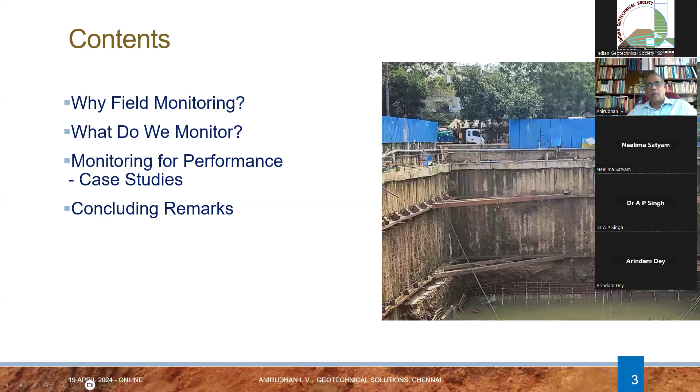Why do we need to monitor a geotechnical structure or geotechnical activity? We all know that soil, or the ground, is very complex, and understanding its behavior is not very simple. However, we simplify the ground and substructure models to satisfy a design, and we often resort to finite element and finite difference analysis to solve more complex problems.

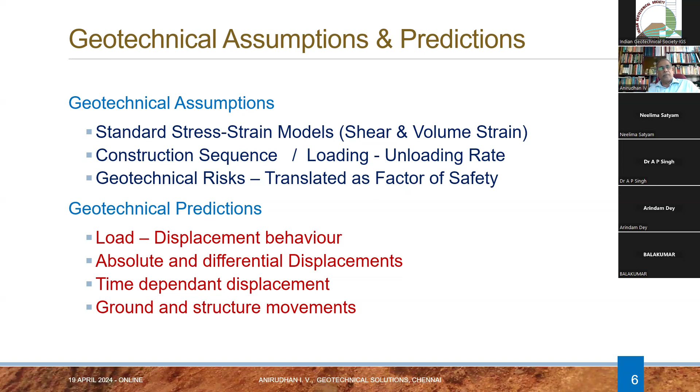We make several geotechnical assumptions to fulfill this design. We assume certain stress-strain models, a construction sequence, and all the geotechnical risks are tackled by a concept of factor of safety. During the design process, we make predictions, especially about the foundation or ground movement under the design geotechnical activity. All these assumptions and predictions are based on our experience and whatever literature we have. Many researchers have produced literature based on their studies, so we use these references to make our assumptions and predictions.

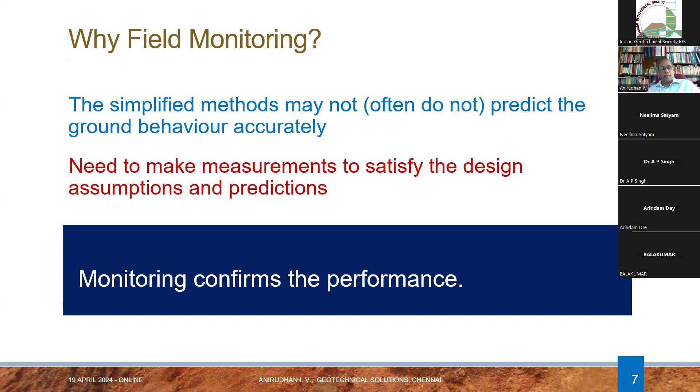But we still have to validate these assumptions and predictions. We can see that simplified methods may not often predict the behavior very accurately, and we need to make measurements to confirm our assumptions and predictions. So monitoring of a geotechnical structure confirms the performance, and to some extent, whether we were good in making certain assumptions and predicting the performance.

It is important to decide what we monitor for achieving our goal of validating our design. Commonly monitored parameters are movements in the ground and the structure, which are predicted during the design analysis. We also measure excess pore water pressure when dealing with improvement of soft clay deposits, and occasionally we measure the stresses and strains in the foundation elements and in the soil, as in the case of retaining walls or deep foundations.

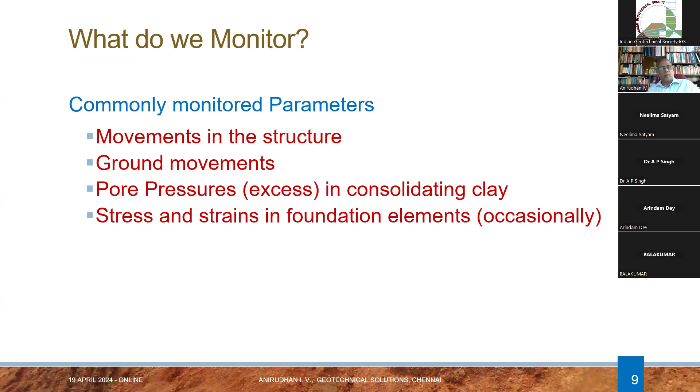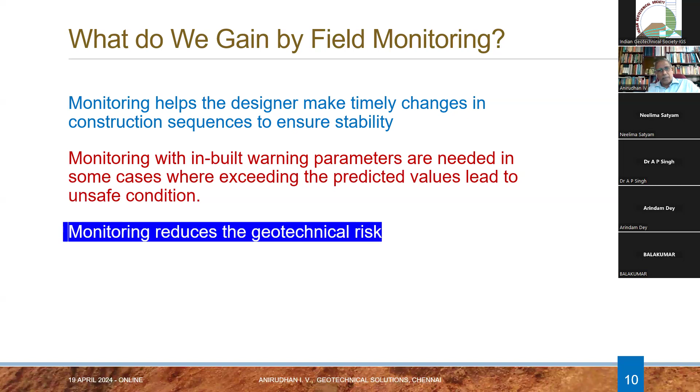So what do we gain by this field monitoring? Monitoring helps the designer make necessary changes in certain cases. We can also provide inbuilt warning stages for attempting mitigation measures if found necessary. Monitoring reduces geotechnical risk. Most geotechnical risks are highlighted when we monitor a structure, and we can take timely action to rescue the structure, make amendments, or take additional precautions to make the structure stable.

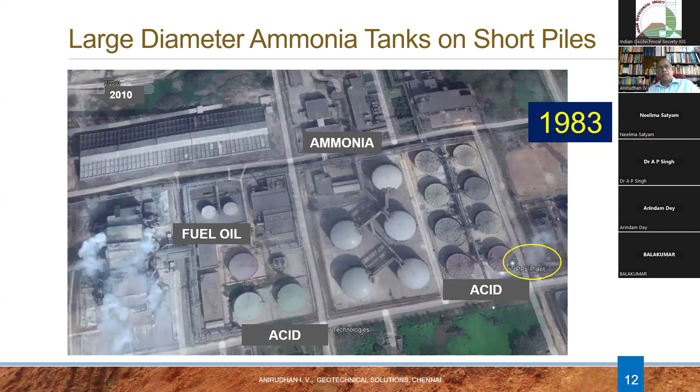I'll present a couple of case studies in which I was involved in the design, execution, and performance monitoring. One case is large diameter ammonia tanks on short piles. This project was executed in 1983, just after my graduation, and was my first field assignment after graduation.

The site is Paradeep Phosphates factory in Orissa, built in 1983. There were 13 large diameter steel tanks storing liquid ammonia, phosphoric acid, and sulfuric acid. All these tanks imposed roughly 180 kilonewton per meter square pressure at the tank base. There were also two fuel oil tanks, smaller in size, built on ring wall foundations because the loading was about 100 kilonewton per meter square.

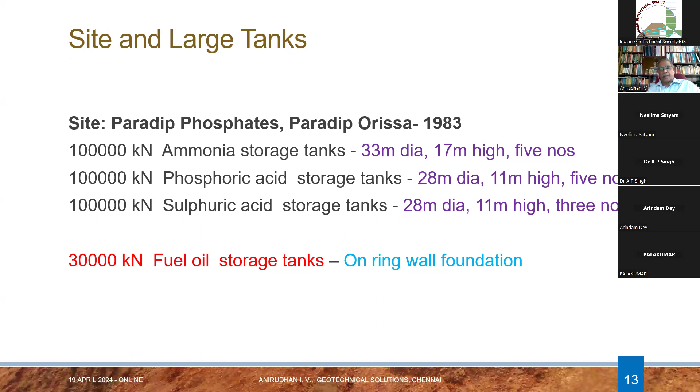The project owners decided to support it on a ring wall with minimum ground improvement, replacing the top 2 meters of soil. The subsoil conditions at the site comprise loose deposits up to about 5 meters, followed by medium and dense soil layers, mostly sandy type soil.

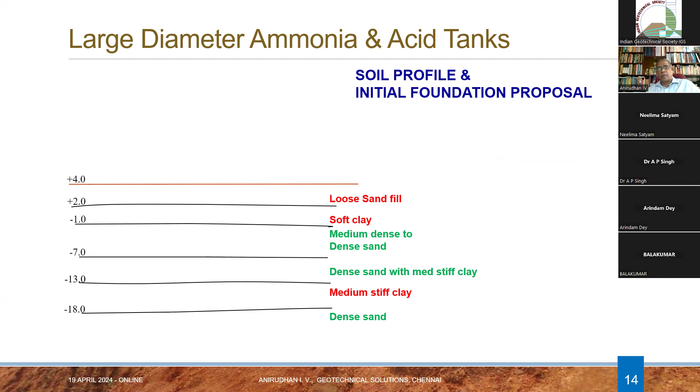In the 80s, small diameter driven cast-in-situ piles were very common, and the maximum size of any pile foundation was 600 mm, in the case of bored piles. In this project, they decided to go for driven cast-in-situ piles of 450 millimeter diameter, driven to a depth of 27 meters.

This was the proposal given by the main principal consultant, and we were appointed later as consultants for some structures on the site, and this ammonia tank foundation design came into our scope.

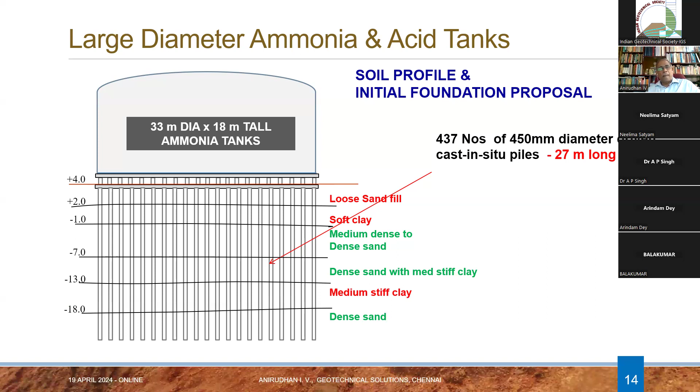We found that there are a lot of challenges in constructing 27-meter long driven cast-in-situ piles. Those who have been involved in or seen how driven cast-in-situ piles are installed know there is a lot of difficulty in handling such long tubes. Even if you use followers, we find a lot of difficulty handling such large follower tubes.

The dropping of concrete from such height can also result in segregation of the concrete. Usually, the allowed dropping height in driven cast-in-situ piles is something like 18 to 20 meters. There is also difficulty in handling very long reinforcement cages. And of course, the long piles, because of all these issues and additional requirements, cost very high compared to the normal standard length of driven cast-in-situ piles.

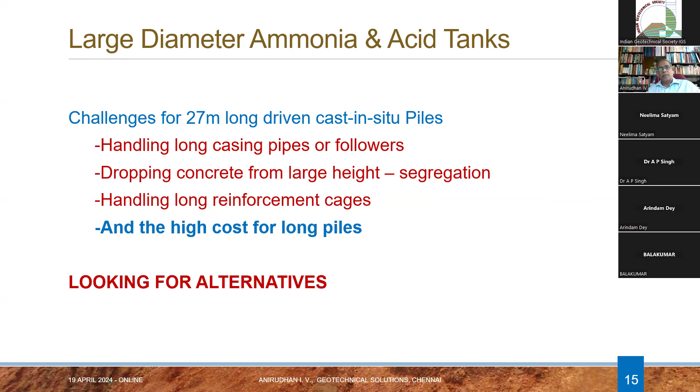So we had to look for alternatives to tackle all these issues. Because of the large loading, since the tank is 18 meters in height, we had to go for deep foundations — a shallow foundation was not adequate. So we had to make a lot of analysis for alternatives, like different lengths of piles.

For finalizing the design, we know that a single pile has very small settlement. We usually measure 6 to 10 millimeter settlement for individual piles when loaded individually. But when piles are installed in a large group, it results in very large settlement because of the very large influence zone involved under the large group.

Unlike a single pile, which has a very small influence zone, a very large group has a very large influence zone, resulting in very large settlements. So we had to do detailed settlement analysis for different options.

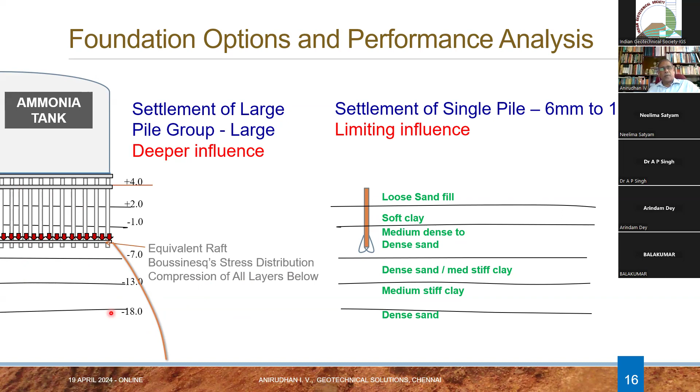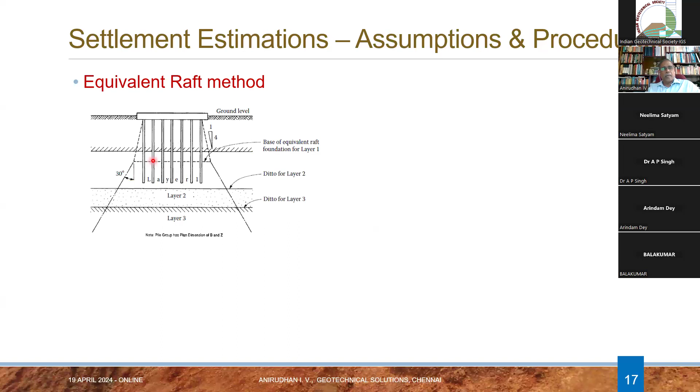During the 80s, we had very limited procedures available for estimating the settlement of a large group of piles. One of the most accepted procedures was assuming an equivalent raft at some depth, usually at 2/3 of the pile length, because of the friction developed along the pile. We assume the load is transferred to 2/3 of the pile length, then it acts like a full raft foundation, distributing from that point like a normal flexible raft foundation.

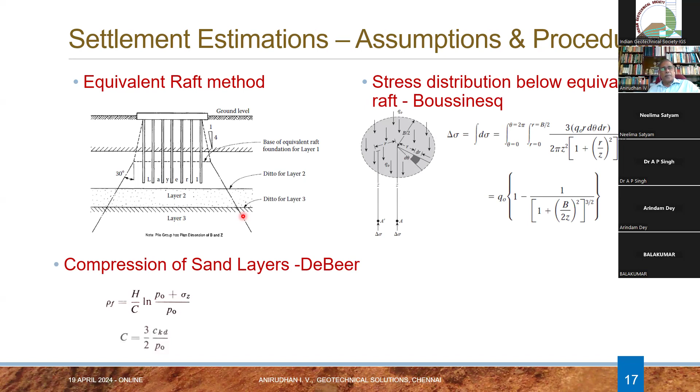We used Boussinesq's stress distribution below the ground for estimating stress levels in different layers, since the profile comprised of several layers. We estimated the compression of sand layers using the standard procedural expressions — these were the standard procedures we used to adopt in those days.

After the estimation, we analyzed a foundation without piles, which resulted in very large settlements, something like 200 to 300 millimeters at the center. We then analyzed the settlement of a long pile foundation, which resulted in about 40 to 60 millimeters at the center and 33 to 45 millimeters at the edges along the periphery.

Because of the piles, we have pile-soil interaction, increasing the settlement along the periphery a little more, and marginally reducing the settlement at the center. So we expected about 40 to 54 millimeters along the periphery in the case of 27-meter long pile foundations.

In the case of shorter piles, like 10-meter and 14-meter, we decided not to go for 27-meter long piles because of the construction issues, and we used the construction methods commonly practiced in those periods.

We tried analyzing the 10-meter pile and 14-meter pile cases, and found these settlements were not varying so much — in the range of 60 to 100 mm at the center and 48 to 64 millimeters at the periphery. Because of the pile-soil interaction, we expect a little more settlement along the periphery, while we expect a small reduction at the center.

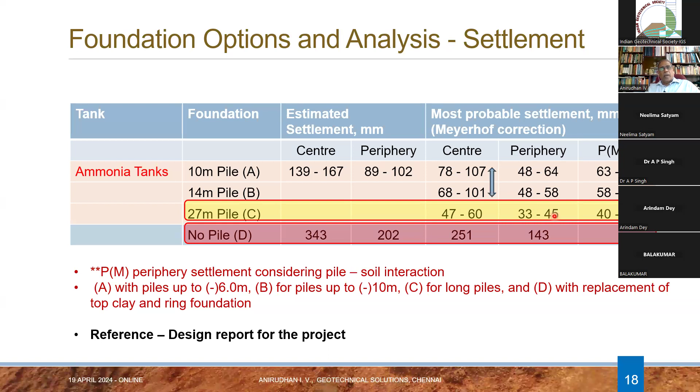So we went for shorter piles below the ammonia tanks and acid tanks. We provided 437 piles of 10-meter length, with individual pile capacity of 55 tons.

For the 10-meter pile, we expected a maximum settlement of 107 millimeters at the center and 64 millimeters along the periphery. But because of the interaction, we expected about 85 millimeters along the periphery once we applied the full loading of the tank.

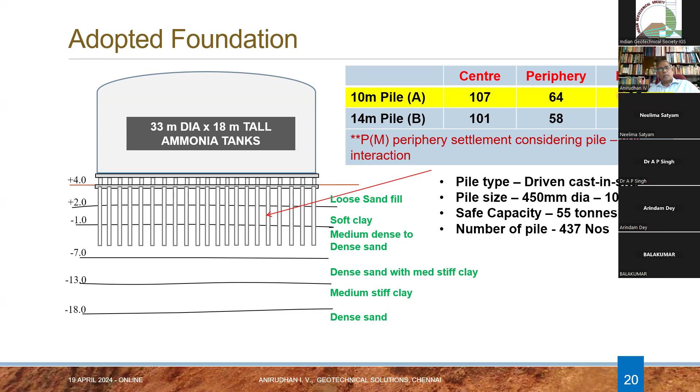So we first monitored the performance of the individual piles by way of conducting individual pile load tests, and we found the maximum settlement under 62.5 kilonewton load is about 5 mm, with an average elastic rebound of 2.8 millimeters. This is a usual finding for any piles having friction as well as end bearing, and the individual piles were performing as we expected.

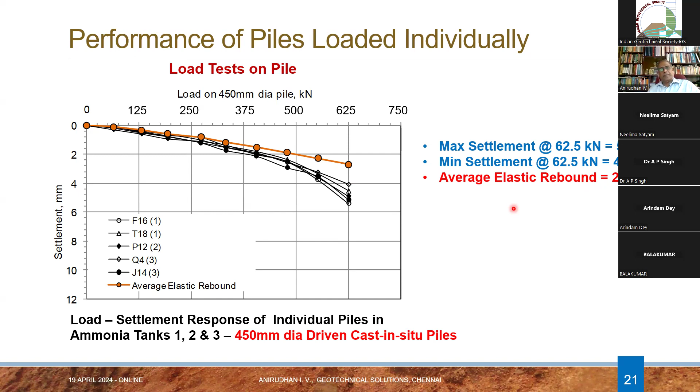We decided to monitor the tanks during hydro test with 8 observation points along the periphery and 1 at the center. We installed one individual single pile as a reference point approximately 50 meters away from the tanks to use as a reference for measuring the settlements.

So we used a very simple method of water tube level measurements for measuring the settlement along the boundary as well as at the center. In this case, the measurement at the center was not difficult because the tank foundation had 2 slabs, one at the ground level and one at about 1.8 meter above the ground, so we were able to go underneath the tank to make any measurements.

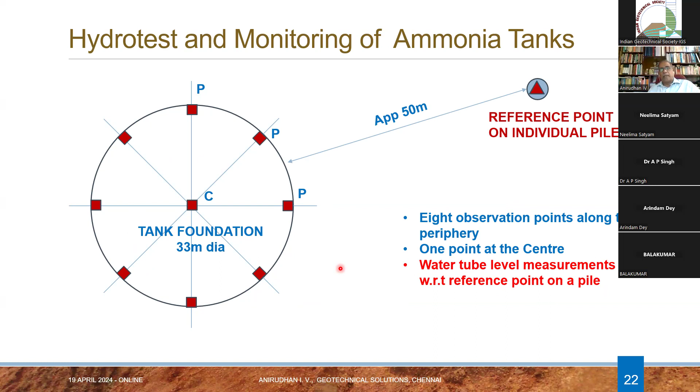We loaded the tank in 4 stages: 6-meter water fill, maintained for about 1.5 months; then filled up to 10 meters and waited for 2 months; 14-meter with 2.5 months holding period; and the maximum water load of 17.9 meters with a 3 months holding period.

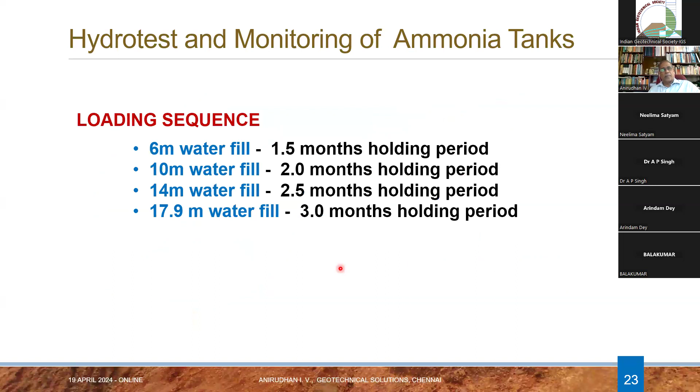So the observed settlements are presented here. These firm lines are at the center and these dotted lines are at the periphery. We measured maximum settlement at the center as 65 millimeters in one tank and 105 millimeters in another tank, and along the periphery we observed 50 millimeters and 78 millimeters.

Whereas the estimated settlements were 78 to 107 millimeter at the center and 63 to 85 millimeter along the periphery.

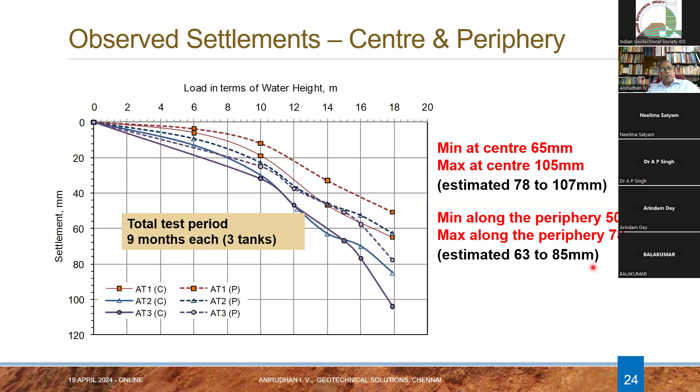This is a plot between the edges and the center. This is at the center of the tank, and this settlement is at the periphery. The firm line represents the estimated value, and the dashed line is the observed settlement during the hydro test under the maximum load. You can see a considerable comparison between observed and estimated settlements, except in the case of one tank, where we had a much smaller settlement than what we estimated. We also observed a typical saucer shape settlement profile, similar to a flexible raft, when the group of piles with a common raft was loaded.

We also had the opportunity to hydro test a fuel oil tank, which is on a ring wall and compacted soil fill. Because these tanks were only 10 meters, we made a comparison between the settlement we observed during 10-meter water height in the case of both tanks.

We can see that the large tanks on pile foundation settled some 20 to 40 millimeters at the center, whereas the smaller tank on shallow foundation settled more than 150 millimeters at the center. This tank also experienced a minor tilt because of the variation in the soil profile below the ring wall.

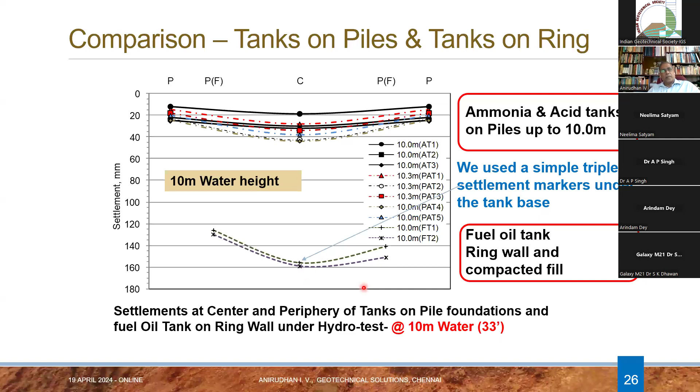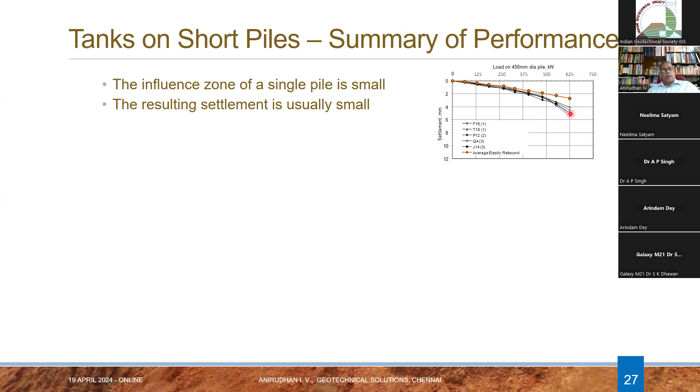And the summary of performance of tanks on pile foundations: you can see that the influence zone of a single pile is very small, resulting in very small settlement, while large groups settle much larger, sometimes 12 to 15 times larger than the single pile settlement, of course depending upon the soil profile below. And we have standard procedures available for making these estimations.

So we have seen that the standard procedure of the equivalent raft method is reasonably good enough to make a reasonable assessment of the settlement of large tanks supported on pile foundations. And we have also seen that even though the piles are shorter, we could reduce the settlement significantly in the case of such heavy tanks of large diameter, compared to those tanks supported on shallow foundation.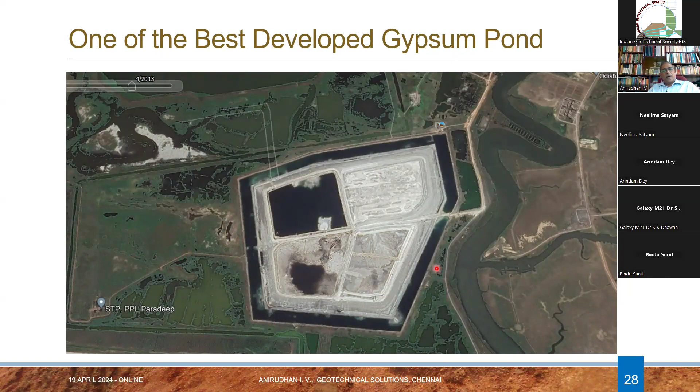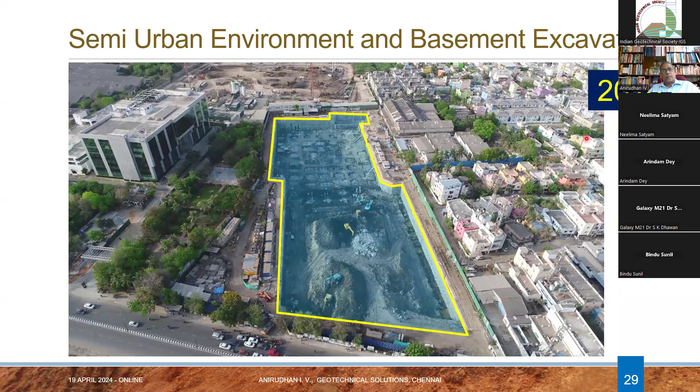Coming to the second case study, this is about a commercial project in Chennai constructed in 2016 in a semi-urban environment, with a lot of existing constructions and buildings. This construction required 3 basements and 12-meter deep excavation, and the available setbacks up to the boundaries were very limited.

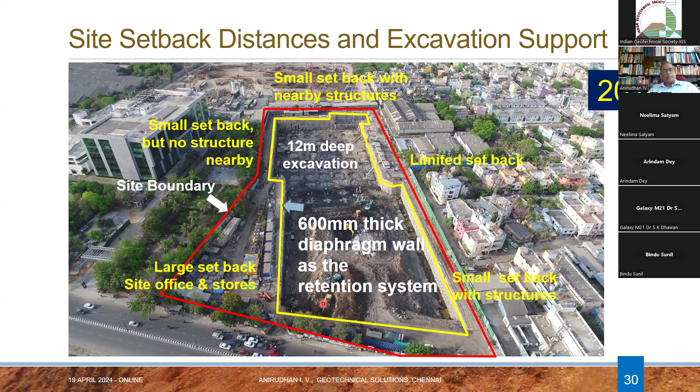The owners decided to go for a 600 millimeter thick diaphragm wall as a retention system for this deep excavation, with 2 levels of anchors along with the diaphragm wall. This was the retention system used in this project. The diaphragm wall went up to a very dense sand stratum, and the 2 anchors also extended into the dense sand stratum.

We had clay layers up to about 18 meters, and we could not provide any anchor before this level because the anchors extended only into the clay layer without producing the required capacity. So we had to start the first anchor at 6 meters, which was a calculated risk at the time, because usually we allow a cantilever length of 4 to 4.5 meters for open excavation with diaphragm walls. The diaphragm wall extended into very dense sand and sometimes into weathered rock, depending upon the profile available at the location of the diaphragm wall.

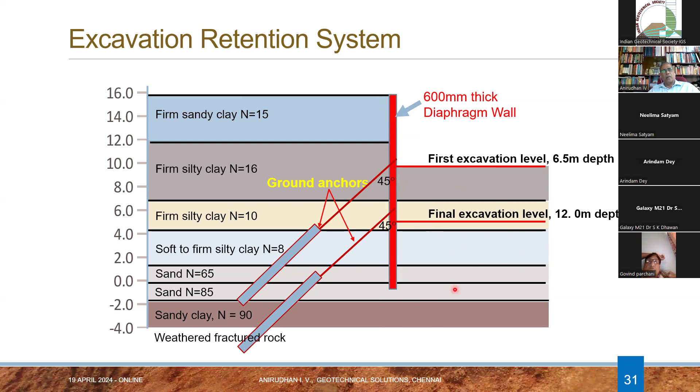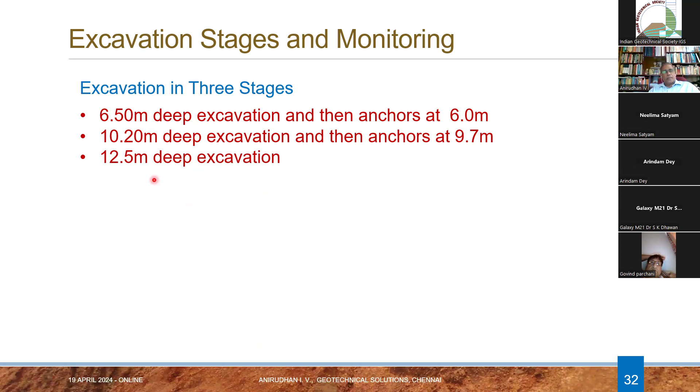The excavation was to be done in 3 stages. The first stage was at 6.5 meters, after which we installed the anchors at 6 meters. Then the next stage of excavation was 10.2 meters, and the anchors were installed at 9.7 meters. Then the last final lap of excavation was up to 12.5 meters.

We also made instrumentation and monitoring arrangements using inclinometers within the diaphragm wall. These inclinometers were installed for the full length of the diaphragm wall, and the wall movement was monitored almost on a daily basis as the excavation progressed. We also had visual examination of the ground during the excavation.

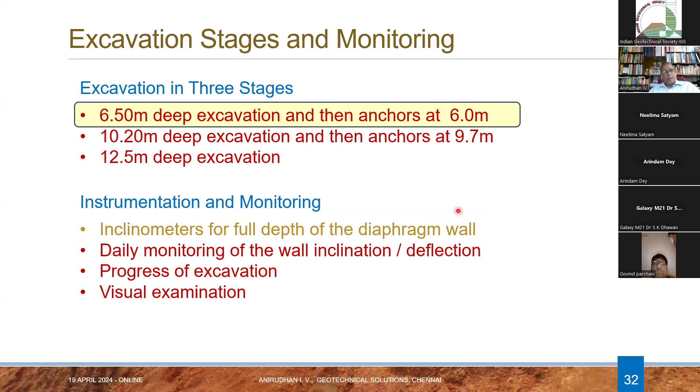So I will present the case we experienced during the excavation up to 6.5 meters only in this presentation, because that was critical for us, and it gave a lot of surprise to us, or maybe a lot of concern, during the execution.

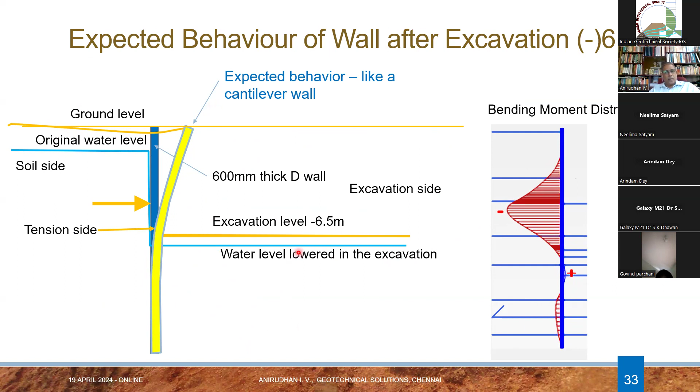So what do we expect of the behavior of a diaphragm wall like this when we excavate without any lateral support, like a strut or an anchor? We expect a very true cantilever performance, where the wall bends like this and the ground settles like this. When the wall bends this way, we generate a bending moment in the wall towards the soil side, with tension on the soil side. This is what we expect during excavation without any lateral support for the wall.

We did the detailed analysis initially using the WALLAP program and later using Plaxis 2D. In Plaxis 2D, we used Mohr-Coulomb and hardening soil models for the clay soil up to 8 meters, but we used undrained B-type soil for inputting the parameters. For undrained B, we input undrained cohesion as the shear strength and all stiffness parameters as effective strength parameters, so the effective modulus and effective Poisson's ratio.

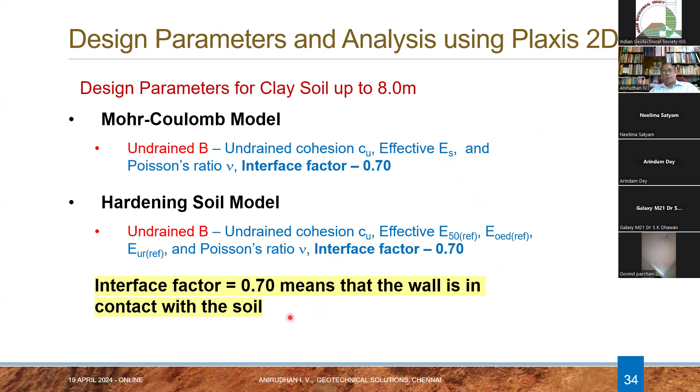We also applied an interaction interface factor of 0.7 between the soil and the wall, assuming that the soil is in contact with the wall all along. So the analysis was carried out using these parameters with the 0.7 interface friction.

Surprising to us, the actual wall behavior after analysis was showing something like this instead of a true cantilever. This blue line resulted from the WALLAP analysis, which is a limit state equilibrium procedure. With finite element analysis, we had this sort of shape after the first 6.5 meter excavation, which is not a true cantilever behavior. So there were some concerns about why the behavior was like this.

The bending moment distribution also showed totally opposite to what we expected. We had the bending moment developed on the other side of the wall, whereas we expected it developing on the side where tension would be, but the analysis showed tension on the other side. We could not resolve this reversal of bending and deflection even after using the hardening soil model suggested by some researchers. This was a design challenge that was not resolved during the design stage.

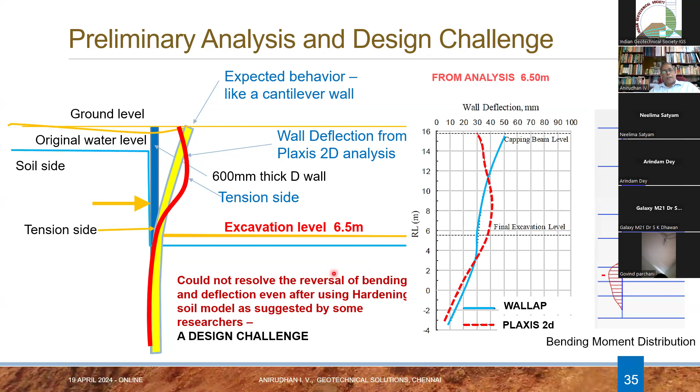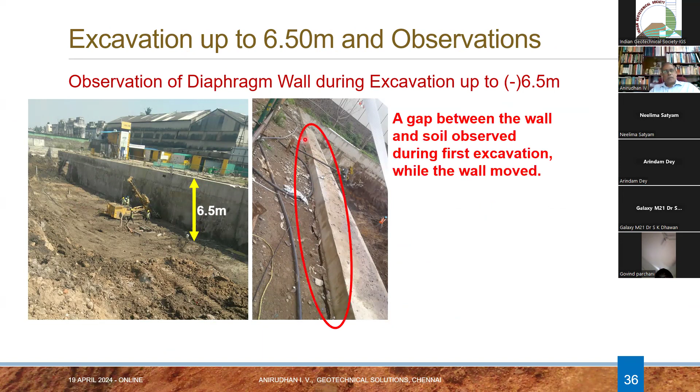When we went for the actual excavation, we started observing the diaphragm wall movement during excavation. When we reached 6.5 meters excavation in the basement area, we found a gap between the wall and the soil, a clear gap between the wall and the soil.

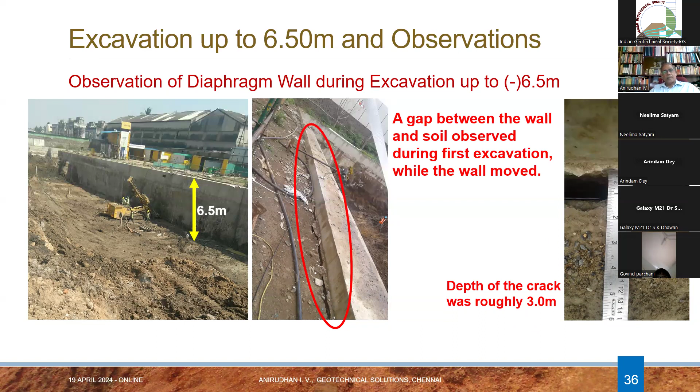This depth of the gap went up to 3 to 3.5 meters, so we could put a small diameter rod through this to a depth of 3 to 3.5 meters. There was a clear gap between the soil and the diaphragm wall.

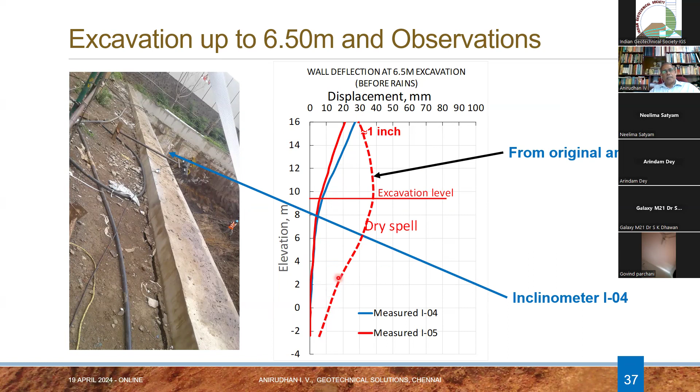The measured deflection through the inclinometer was like a cantilever wall, as we expected. If you remember, we estimated a deflection like this, whereas the actual observed deflection was pure, like a pure cantilever wall. So this was what we were expecting, but the predicted deflection from the analysis was like this.

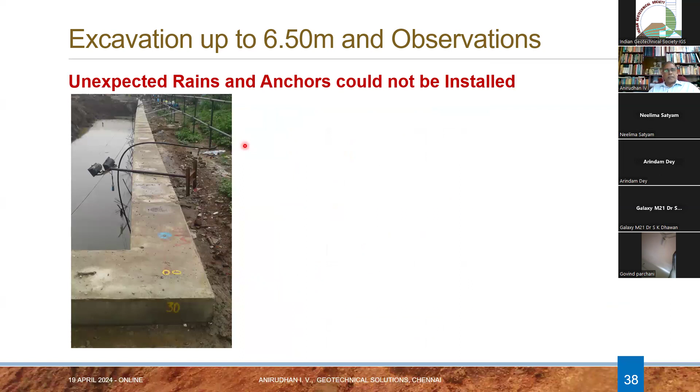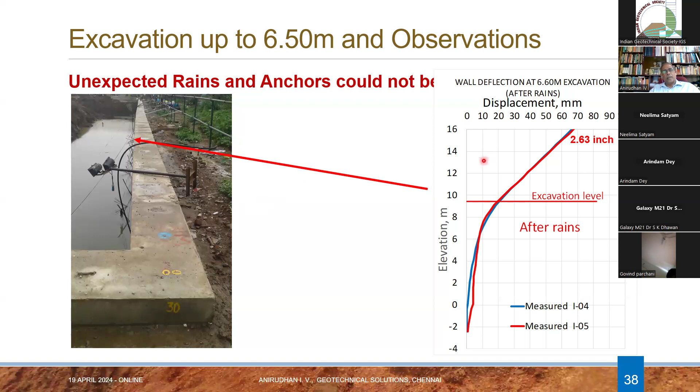Then, unfortunately, there was an unexpected rain, and the anchors at 6.6 meters could not be installed, so the work was stopped. But the measurement of the wall movement continued, and we observed very large deflection after the rains, which went up to 60 millimeters. Whereas in the initial stage it was only 30 millimeters, which increased to 60, 70 millimeters after the rains. So there was a sudden increase, obviously because of the increasing groundwater table and the increased weight of the soil due to saturation.

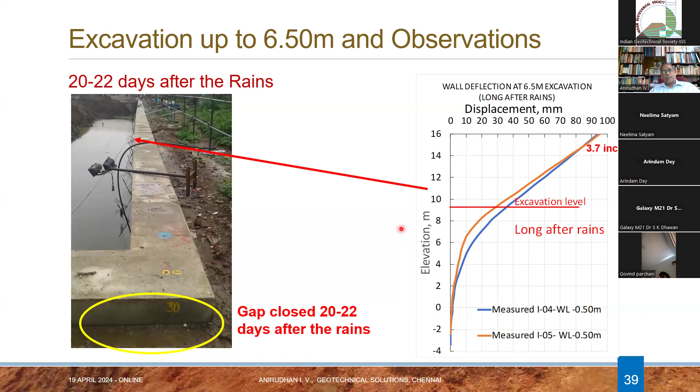So if we summarize the monitoring after 6.5 meter excavation: initially during the dry spell it was deflecting like this. After the rain, when the soil got saturated with high water table, it moved to 70 millimeters. Then all of a sudden it moved to 100 millimeters, and the gap between the wall and the soil closed. This is the summary of the monitoring of this tank during the first stage of excavation.

And as I said, the estimated deflection was very small and in a different shape as such.

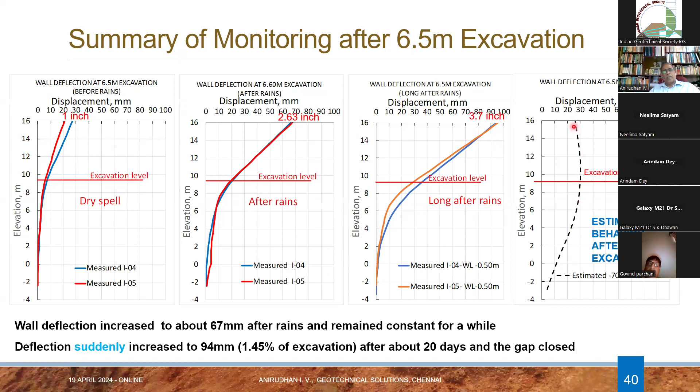So there was significant concern about the performance of the wall, and we had to review the design, especially because the diaphragm wall behavior was totally different from the design, and wall deflection was 2.5 to 3 times larger than estimated, and failure conditions could be different.

And the stability after final excavation of 12.5 meters was also a big concern, because it had already moved 100 millimeters. What would happen to the wall when we excavate up to 12.5 meters?

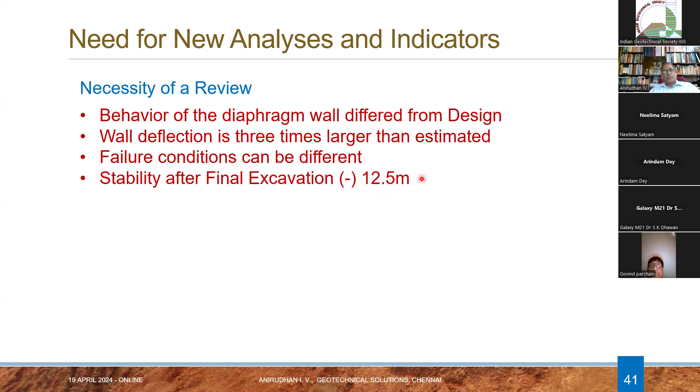The main indicators of the monitoring were: there was a gap between the wall and the soil after excavation during the dry stage. Then the soil got saturated during rain and the water table raised, and it moved again. Then all of a sudden the gap between the wall and the soil closed, allowing the wall to move further.

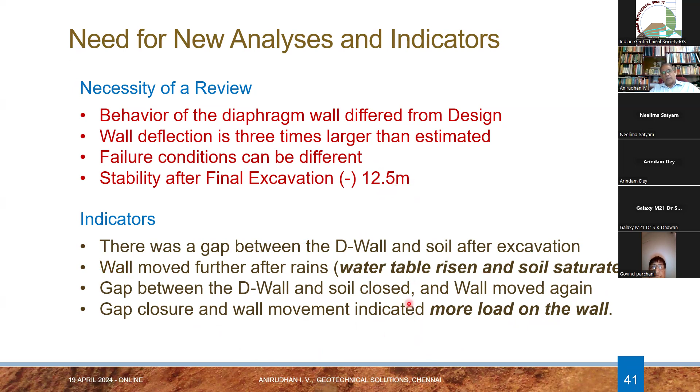So the gap closure of the wall and the wall movement indicated more load on the wall. We had to review the analysis, and we did it in 3-4 stages.

The first stage was we analyzed the wall again with zero interaction, because the gap between the wall and the soil indicated that there was no interaction between them during the first stage of excavation in dry condition. So we assumed zero interaction between the soil and the wall for the first stage analysis.

Then we saturated the soil behind the wall and raised the groundwater to about 0.5 meter below the ground, and analyzed again.

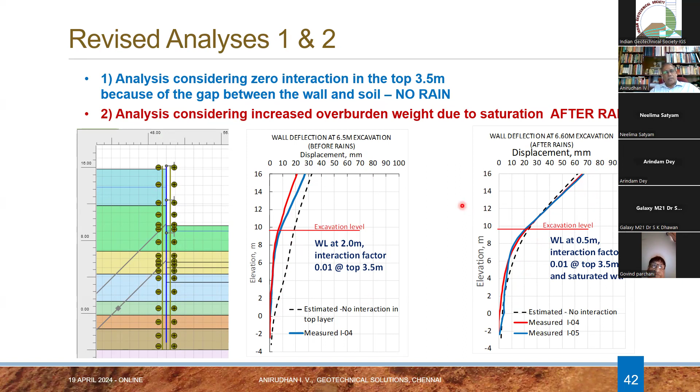So these dashed lines are the estimated values, and the firm lines are the measured deflections. Here we can see there is a good comparison between the estimated one, the revised estimated one, and the actual measured deflection. So we understood that we were on the right path in reviewing the design.

Then we had to look at the last, final stage of the wall movement, in which the gap was closed. We assumed that the soil had moved as a block, but that wasn't happening automatically in the Plaxis analysis, so we had to induce some block failure mechanically in the model.

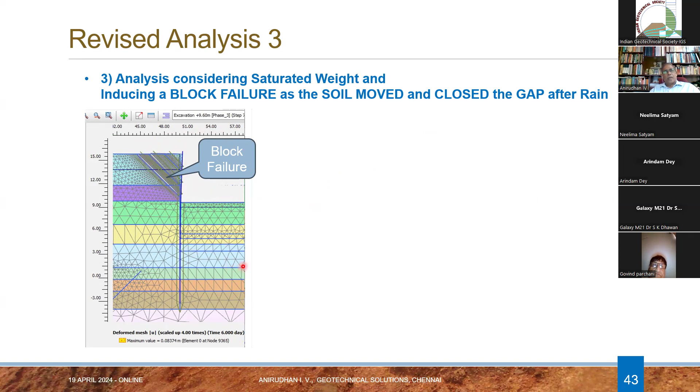And we analyzed and got the deflection of the wall. This dashed line is the deflection estimated from the analysis, whereas the firm lines are the actual deflections. We also estimated a very high bending moment.

Fortunately, it was marginally less than the maximum bending moment we got after the final excavation in the initial analysis. And because of the unexpected behavior of the wall during the first excavation, we decided to go for a very high design bending moment, even though we got a smaller bending moment. So that saved the structure from any failure because of these large deflections.

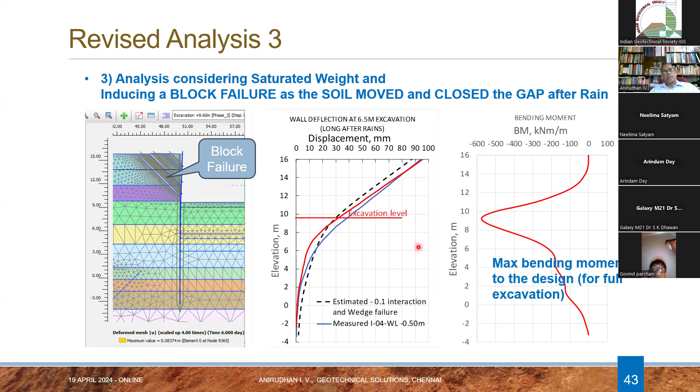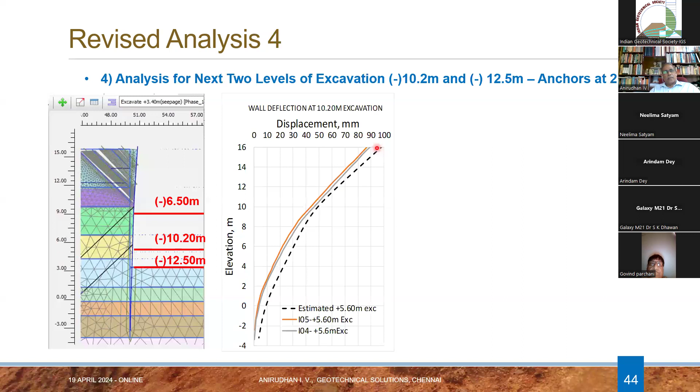We also had to do the analysis for the next two level excavations, that is up to 10.2 meters and 12.5 meters, with two anchors at two levels. So we did that analysis and got the expected deflection like this. This is at 10.2 meter excavation, and this is at 12.5 meter excavation. After the full excavation, we got the measurements from the inclinometer, which really matched the expected performance of the wall.

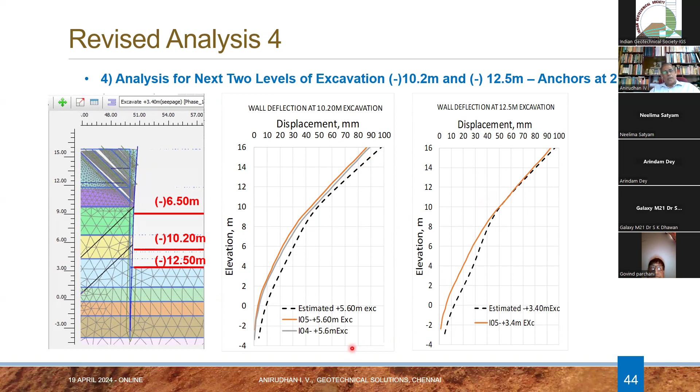After the revised analysis, some of the concluding remarks based on these case studies: the monitoring of foundation behavior has great importance. Monitoring helps to confirm the design and analysis, and brings out anomalies in the assumptions, provides insight for better and realistic analysis, and facilitates adequate revision in the design and mitigation.

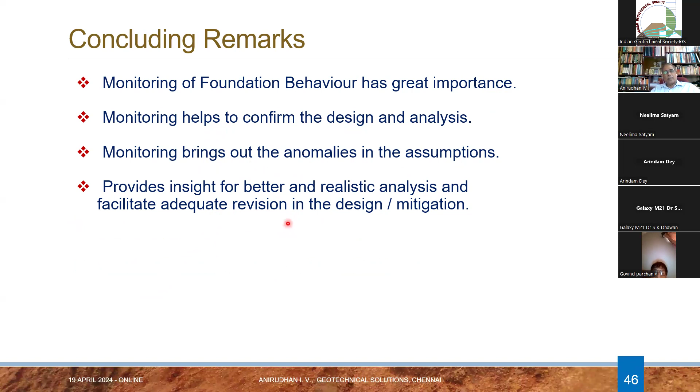If you have any questions, this is my presentation. Thank you.

I think I took 40 minutes. Can I ask something? I'm Dr. Dhawan from Delhi. Yeah, can I ask something?

Very good presentation. But based on my field experience, regarding the monitoring part, what type of sensors did you use, and what was the location?

We used only inclinometers. The tube is installed with guides, and we lower the inclinometer and measure the inclination of the tube. It's only simple measurement, that is for the wall. And for other tanks, we used only water tube measurements. Nothing sophisticated was used in this monitoring.

See, your excavation was 12.5 meters. So first layer 6.5, yes, then 6.5 to 10.2 — what are the extra things you have to take care of for the excavation?